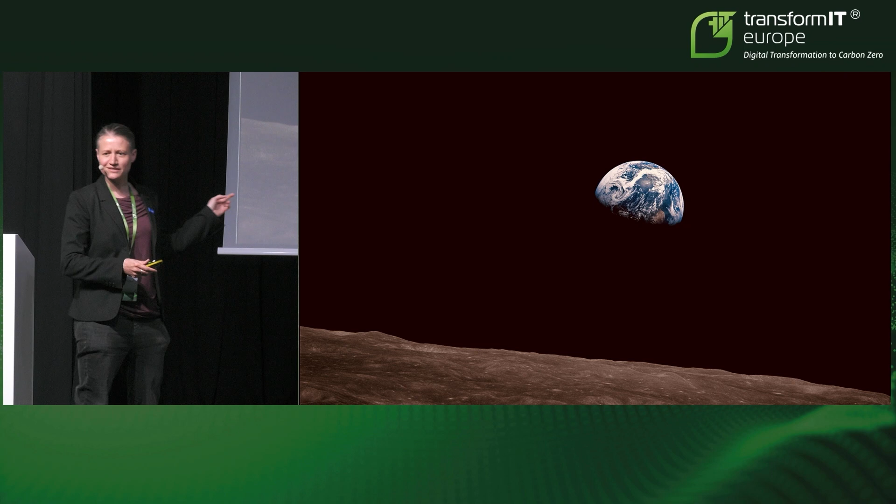For this talk, I wanted to start with the big picture, and this was one of the biggest pictures I could think of. Does anyone know this image? Who knows the image? All right, you do.

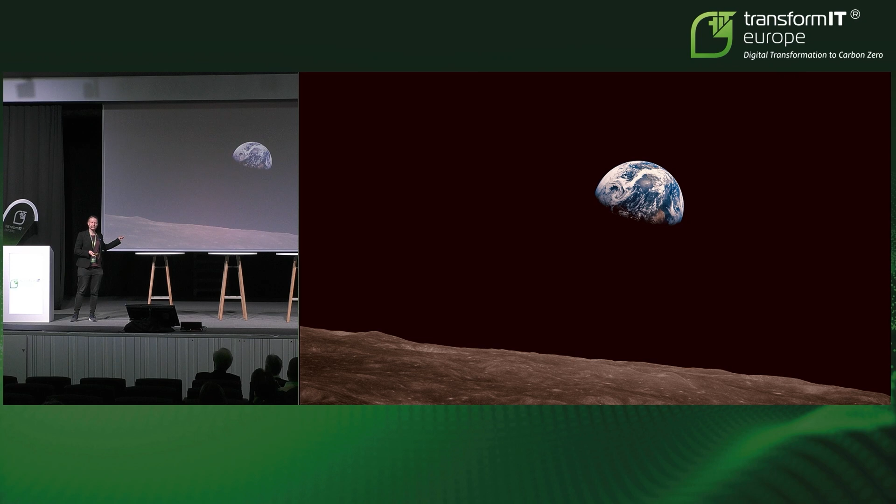This was actually the first color photograph taken from space. It was from the Apollo 8 mission in 1968. 40 years later, the astronaut who took it, Bill Anders, said, we set out to explore the moon, but instead we discovered the Earth. This picture really became an icon for the early environmentalist movements.

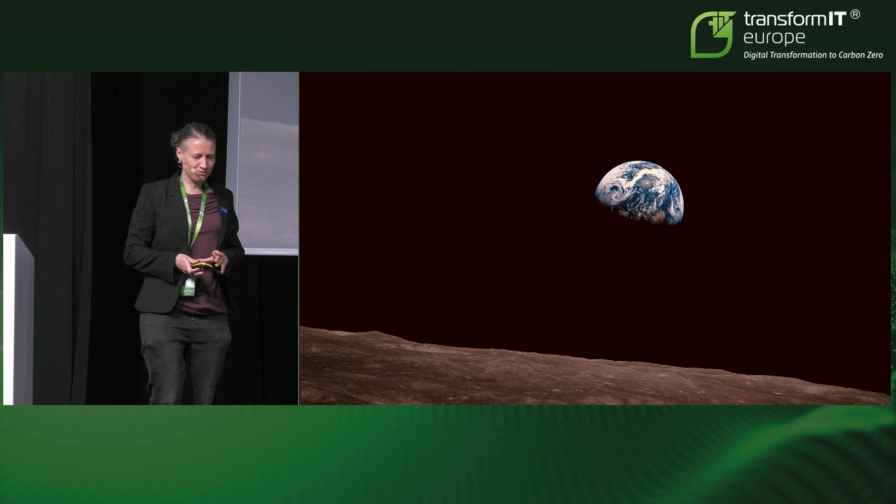Back in 1994, I think, when Angela Merkel took over the Ministry of the Environment, she said more than 4% of renewables in the electricity mix is simply impossible, we can't achieve that - and we've heard it a couple of times before today. Luckily, this didn't age too well.

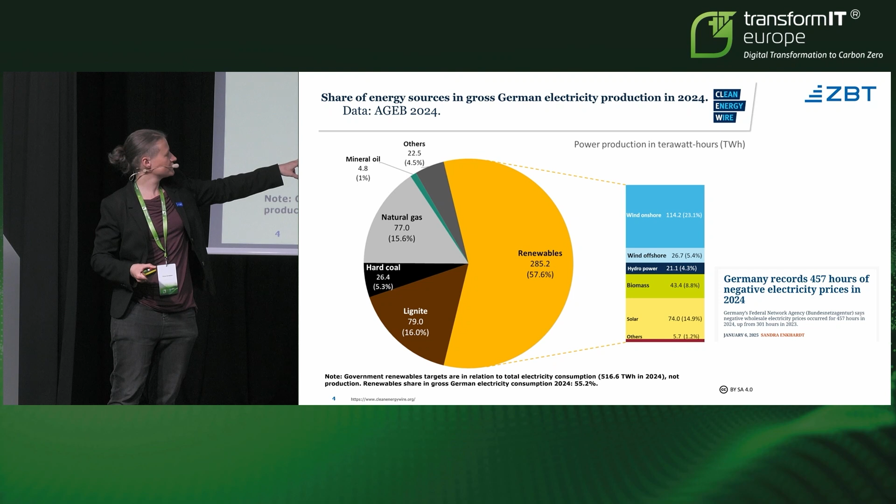When we look at the German electricity sector last year, numbers vary slightly, but it's about 60% derived from renewables. However, there's literally a price to pay for that - Germany saw over 450 trading hours with negative electricity prices, so they had to pay money to get rid of electrons off the grid. So you can really say that with 60% renewables, particularly from wind and solar, storage is really key.

To complete the bigger picture, if you look not at electricity but at the primary energy mix - this is why I was guessing 20% might be the share of renewables in the primary energy mix in Germany. It's only about 20%, and you can tell that, except for lignite, pretty much all of the other energy carriers are being imported into Germany.

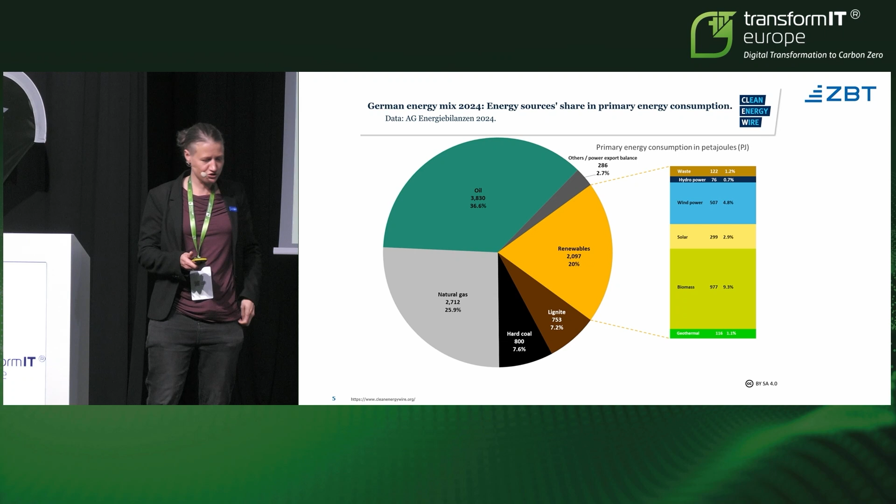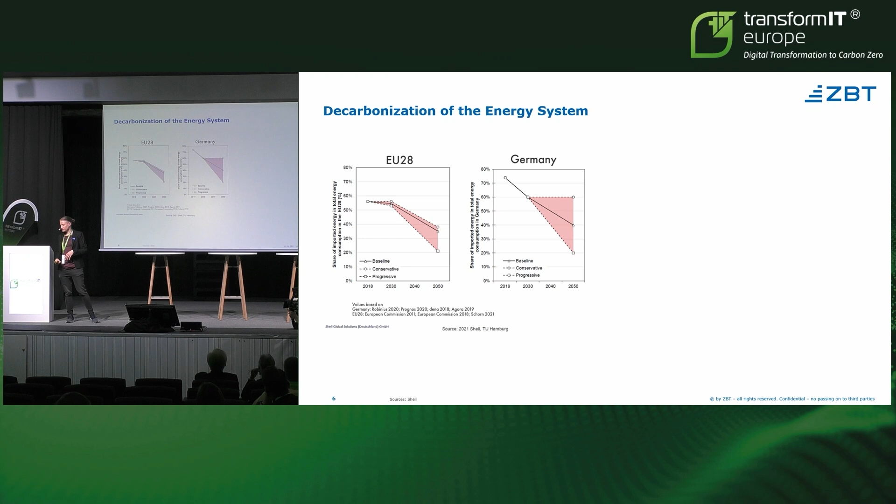But how does the future look like? Well, it's always tricky to look at the future. There are different models as to how this import dependency of energy carriers might develop, but all of the models looked at, for instance in this meta study, basically say that in the future both the European Union as a whole and Germany will still remain reliant on the imports of energy carriers.

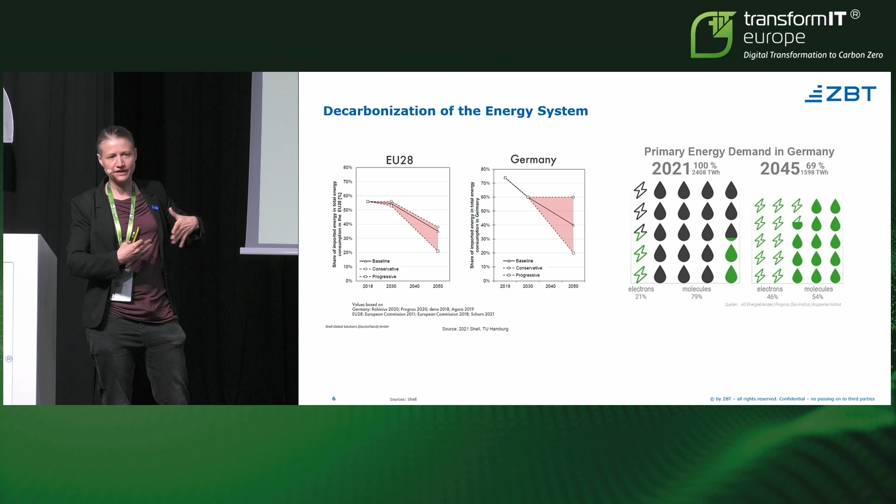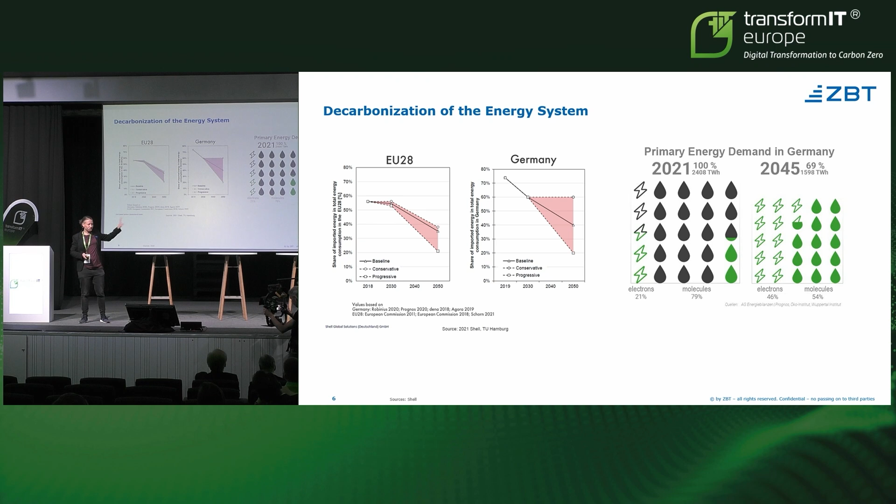Electrification is key, and we should really try to increase electrification in the whole primary energy sector. But even with a very optimistic view - expanding electricity in the primary energy sector, and with efficiency even reducing primary energy demand - these meta-studies from the Wuppertal Institute say that we will still need molecular energy carriers to be imported and maybe also generated.

This is really where hydrogen comes into play, because we believe if you have energy carriers that don't even contain carbon, nobody can actually come up with the idea of burning them and releasing more CO2 into the environment. So much for the introduction as to what role hydrogen could play in the whole system as an energy carrier.

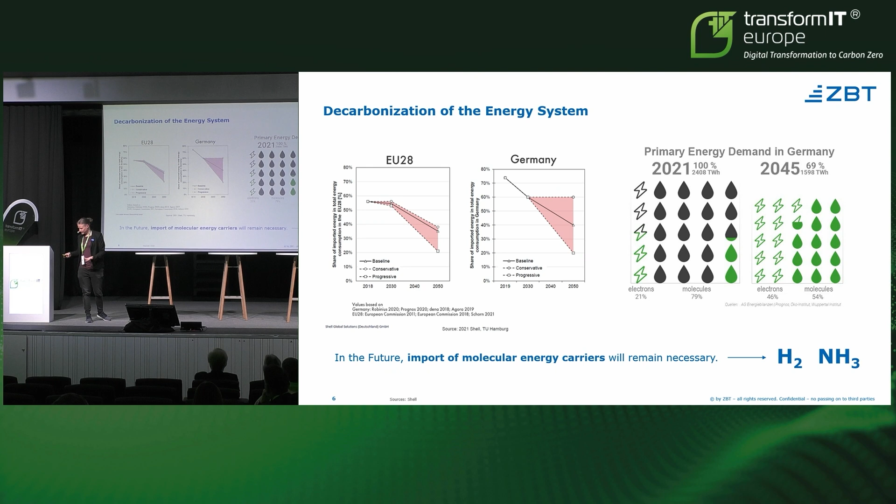When we look at a potential system that builds on hydrogen as an energy carrier, I want to quickly go through the different parts of that - production, distribution, storage, and also end use. We're doing research projects in all three branches, and I just want to give a super short overview about them.

When we look at the production of hydrogen, today this is mostly being done by steam reformation of fossils, so of natural gas. This is not carbon-free.

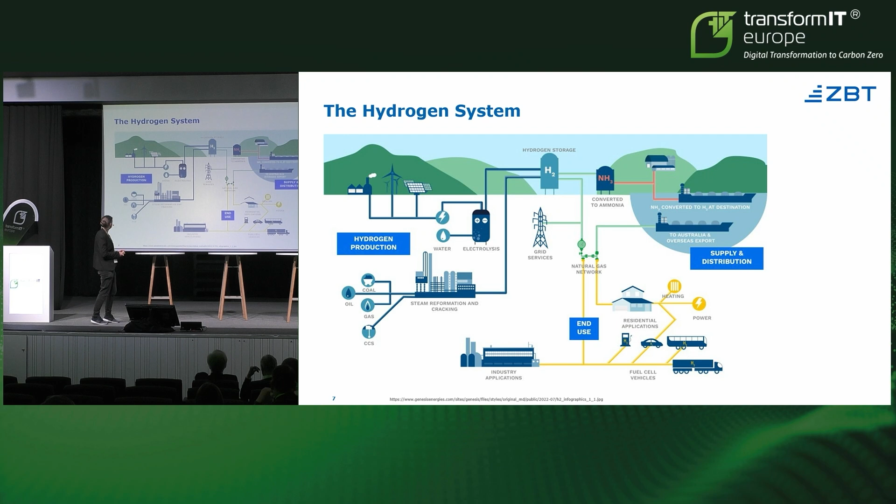We hope that in the future more and more hydrogen will be produced by electrolysis. You use renewable electricity to generate hydrogen. You can then store it, distribute it, use it in various ways, or ship it over long distances. First, I'd like to look at the production side.

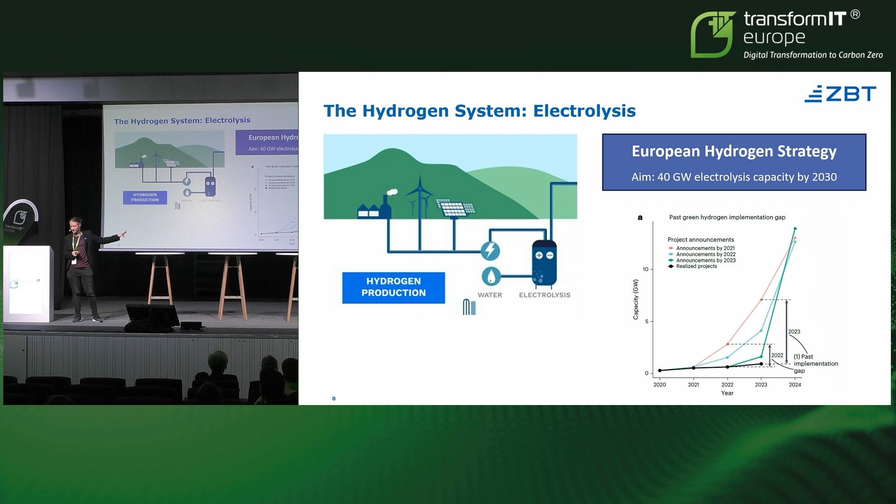If you read the European Hydrogen Strategy, the aim is to have 40 gigawatts of electrolysis capacity installed by 2030. When you look at how much has really been installed versus what's been announced, you see a massive implementation gap. I think it's safe to say we will miss this target. But it's the same as with climate change, it's not irrelevant by which margin we miss it.

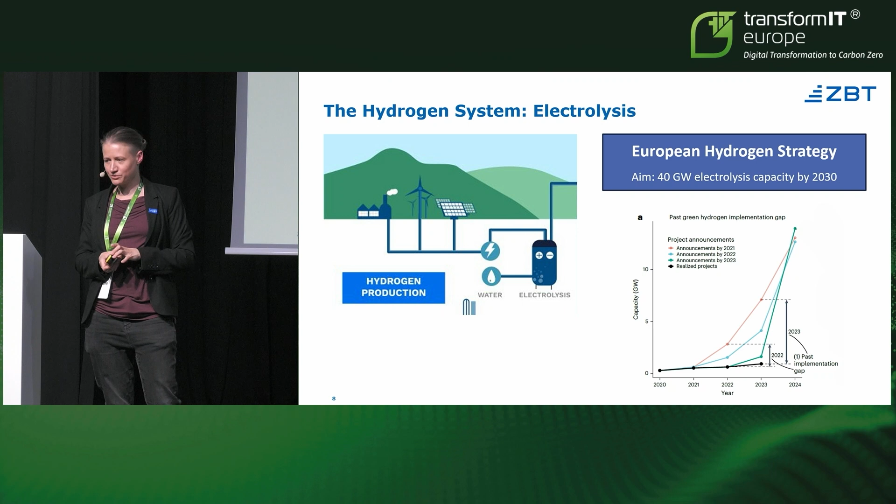Unfortunately I don't work for any of these companies, so I don't know the details, which brings me to the transparency topic we might discuss later on. I can't tell you how much of this has already been installed, but it's going to be interesting to see over the next couple of years.

Zooming back to storage and distribution: if you think of hydrogen storage, you might think of these containers that can hold hydrogen gas, or even more sophisticated liquid hydrogen. That's all nice and marvelous engineering, but when we think of hydrogen really helping us have a resilient energy system, we need to look at something else.

That is caverns deep down in the earth. This one is about 1,000 meters inside the earth and has about 500 cubic meters, which is not an awful lot. But the people who tested this as feasible will now scale it up by 1,000. The idea is to store large amounts of hydrogen in the ground, also for resilience purposes—right now we appreciate having energy in the form of gas backed up for a couple of weeks.

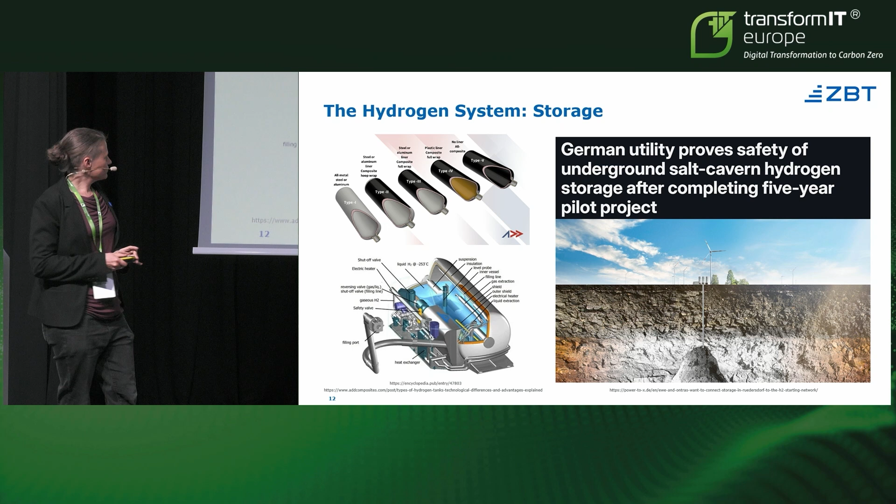When it comes to distribution, we can look at the European plans for the hydrogen backbone. This is about 40,000 kilometers—I now have to speed wrap a little—40,000 kilometers planned, mostly repurposing natural gas pipelines, which has also been proven feasible.

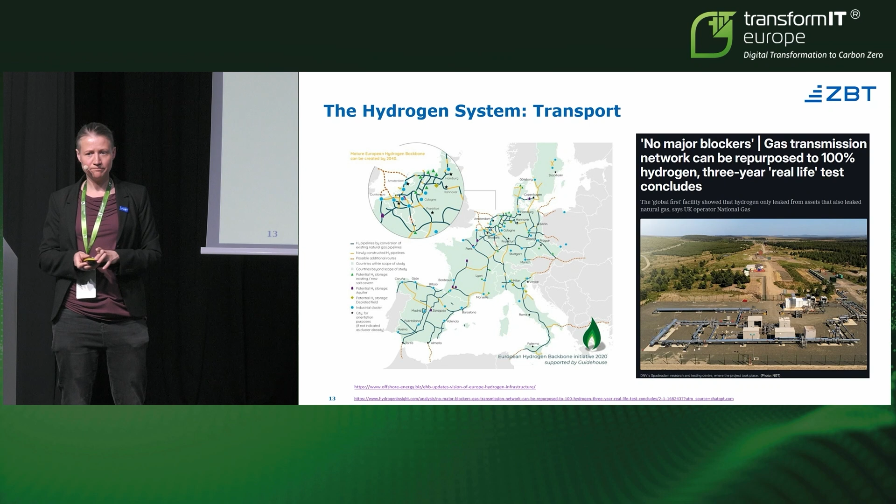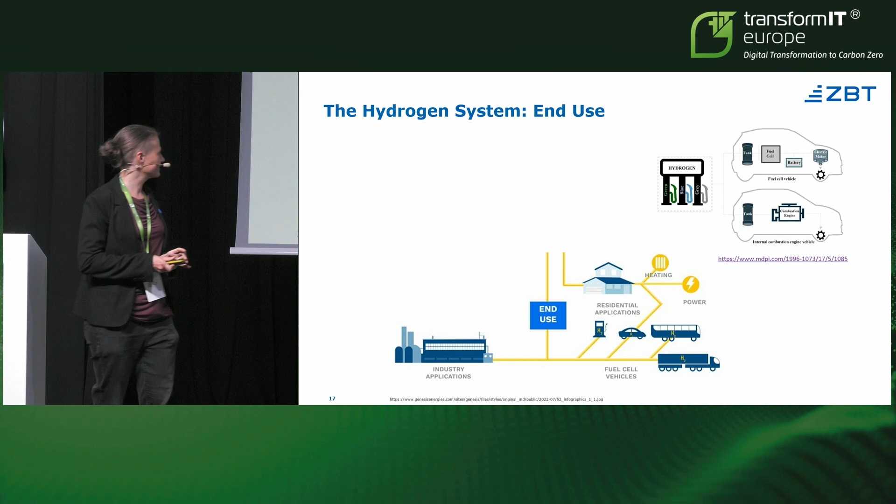Since Thomas already talked about mobility a little bit, I'm going to completely skip the whole mobility part of hydrogen because I think it's being discussed enough anyway.

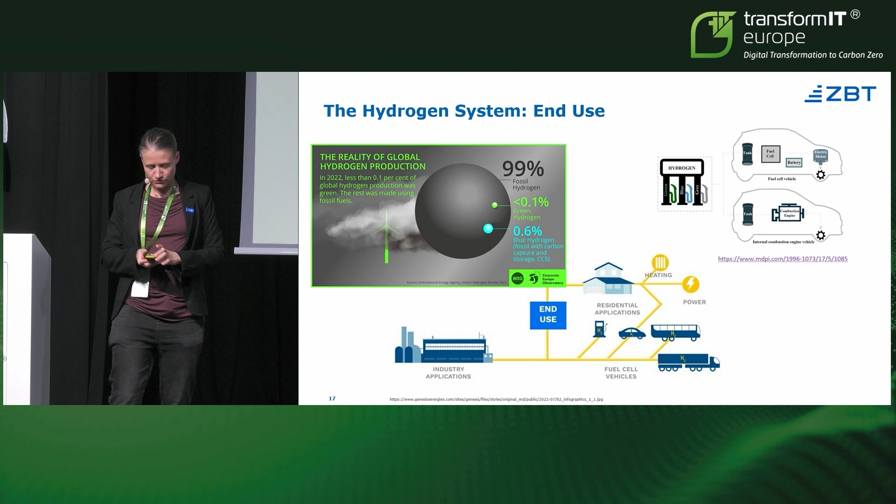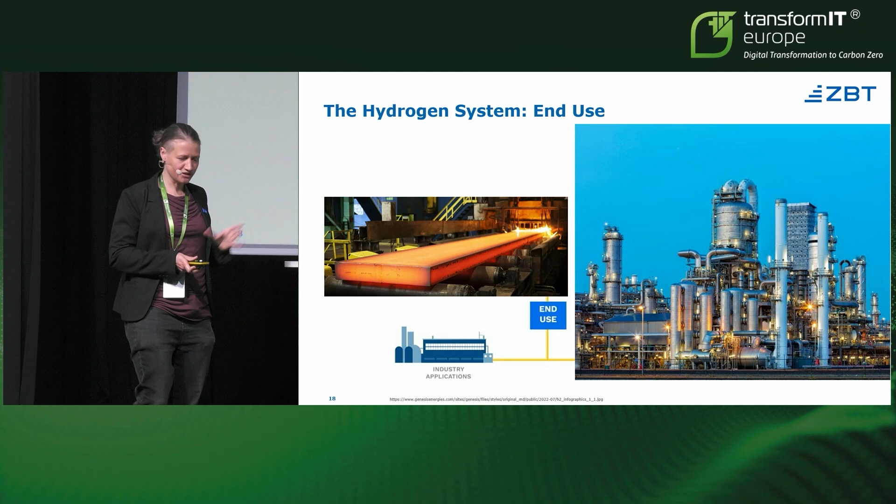One thing I'd like to point out again: today, 98 or 99 percent of the hydrogen we already use in refineries and to make ammonia is derived from natural gas and fossil sources. So turning this green is really the no-brainer we should do first. This is a refinery, and this is a steel factory—just saying, that would be a massive lever if we put hydrogen there, we could really save emissions.